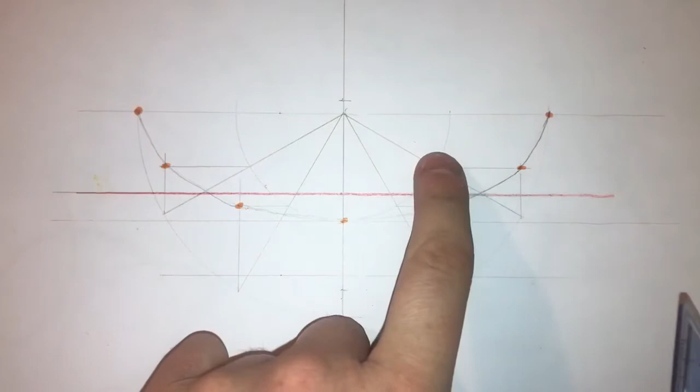Okay, so the next step we're going to do is use this mirror line here, or axis of symmetry, and we're going to mirror down all these 7 points here that I have down the far side, and these points here below the line obviously have to go mirror above the line. So start off with this first one.

Now this first one should be in line, and when you check it out, because I've marked my lines at the start, this distance here should be the same as this distance, which it is. Okay, so there's one of the points there.

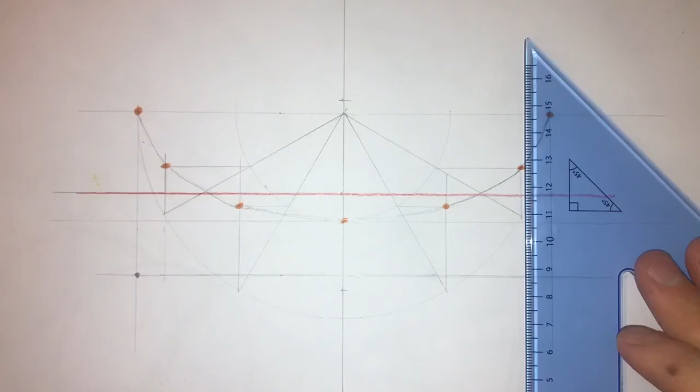Next point, let's transfer this one down. This one will move above. This one will also move above, slightly above. This one will move below, and this one is already transferred. So obviously these 2 points will mirror down the same distance. This point here, so using our compass, point in the curve, using our compass again.

So what I just did there was I used my set square just to transfer this point, because they're the exact same points really here, distance around the mirror line, and same with this point over here as well. Okay, so the distance from the red line to the orange point is the distance from the red line to my new point, and so on. Okay, so now as I join them up, you'll start to see. So join them up quickly here again.

So sometimes getting up off your seat, or wherever you're seated drawing, and trying to use the natural arc of your wrist to draw in this ellipse is a little bit easier and looks a lot better when it's finished also. Okay, so what I have here is 2, I suppose, semi-ellipses or half ellipses.

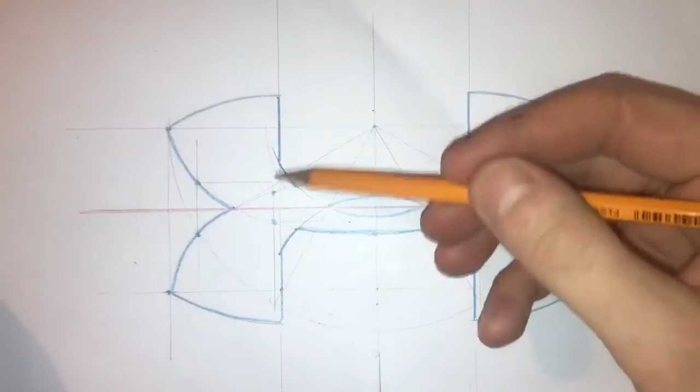So just having a quick look at the actual solution. This is what we've drawn so far. We've drawn this portion here, we've drawn this portion here. Now, the next stage is going to draw in these lines here. And if you look at your actual drawing here, you can see the measurements here are 70, and we've an arc here that's 40 from the central point. That's another 5 mil up from this line here that we've already drawn in.

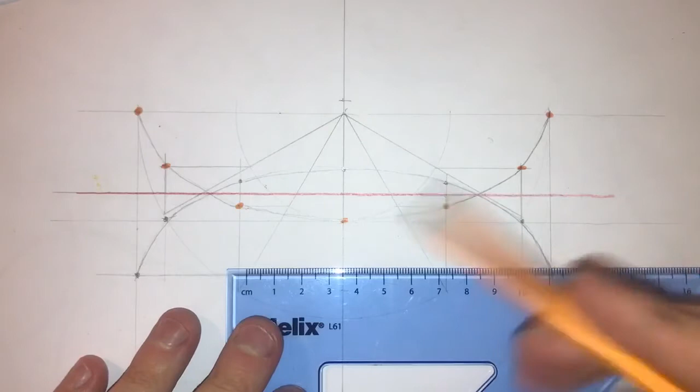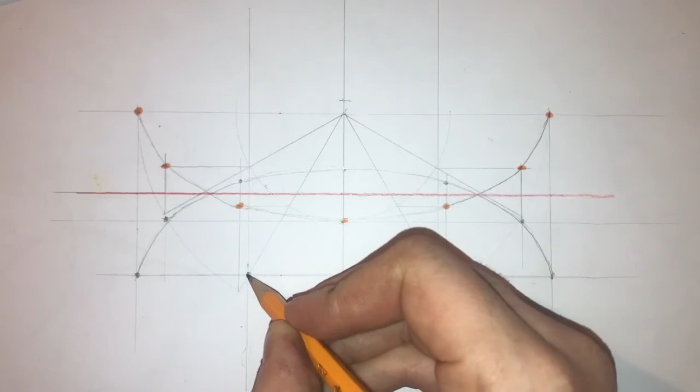Okay, so what I'm going to do now is step out the 35 either side here. Okay, so where that 35 mil line, this line that I just drew in, crosses this line here, I'm going to now use my compass to draw in this arc here.

Okay, and that has just got radius R on it, but it's from that point where those 2 lines I've drawn down there have struck this bottom line here, and it should work the same on the far side, which it does. Okay, and same thing up on the far side, it should also work up here. So as you can see, a lot of it's kind of repetition really, to be honest.

So one of the last curves that we need to do is of radius 40. So I'm going to go ahead there now. So the radius 40, remember, is actually a measurement that we've had from before. This distance from here to here, the radius of the minor auxiliary circle, is 40. So from this point up here, we are going to draw in our semicircle. And it's where our semicircle hits those 2 divisional lines that go up and down the sheet here. So I'm going to draw this in here.

Now there are a lot of lines intersecting each other here, but don't panic for a second. I'm going to show you a nice little tip in just one moment. So obviously same down here as well. Semicircle there. So you've got a lot of lines that have been drawn there in the last few moments. So the next step that I want to do is start to go around the outside of it.

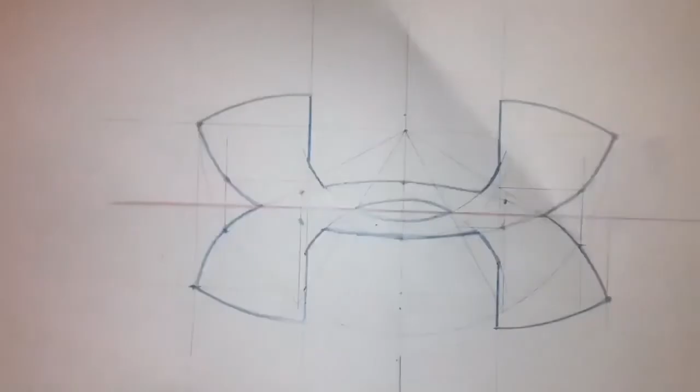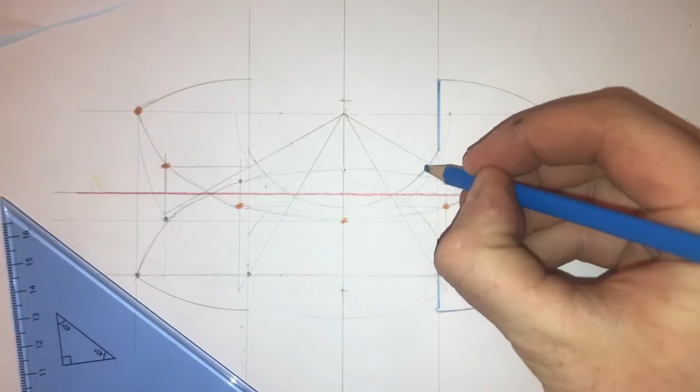Now using our solution that's in our textbook, or the one that I have done here, start to draw in the points you know, the lines you know that are the actual outside. And this just helps with drawings like this, especially the ones that are a bit more challenging. Use your solution, or the solution that's in your textbook, to finish it off. Okay, so if you go around the drawing, you will see this. So this is the tricky section in here.

So if you go around that, now I'm doing it quite quickly for the video. You would just take your time a little bit. I'm flying along here just to make the video a little bit shorter and easier to upload for you to see.

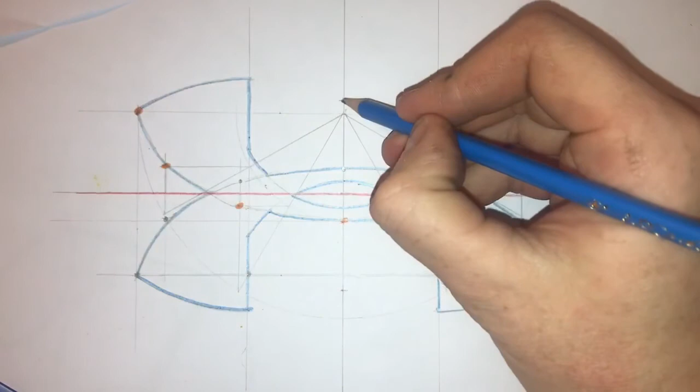And then don't forget a little bit down in the middle as well. So that's where these two arcs here intersect that have swung from this central point here, radius 40. And if you want, you can start to see there now the actual outside of our Under Armour symbol standing out, more clear for you.